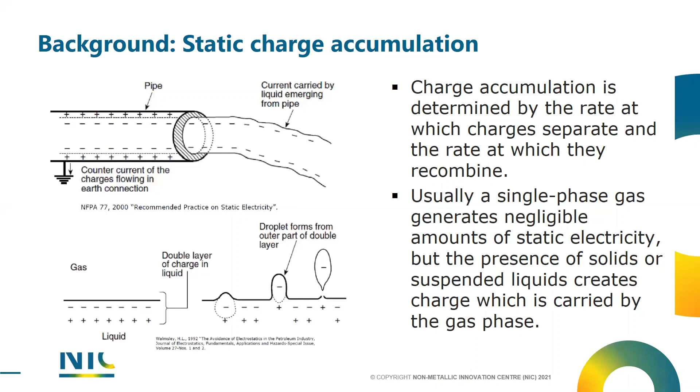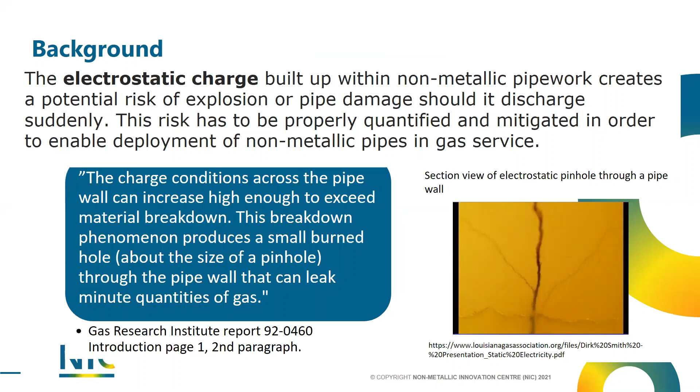So the risk of electrostatic discharge should therefore be properly quantified and mitigated to ensure safe operation of non-metallic pipes in gas service, and this is a challenge that we've addressed in this work.

Our aims were to develop a model of a non-metallic system, and this would be a multi-physics modelling approach to assess the risk of electrostatic discharge. The problem is highly nonlinear and multi-physical, and we would validate the model against experiment. So that was a challenge.

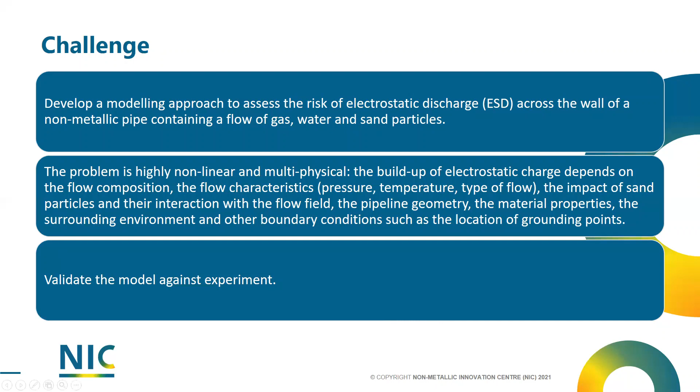So can we predict the risk of electrostatic discharge in non-metallic pipes? We created a hierarchical assessment method, whereby increasingly more detailed and complex models, as you progressed down the levels, gave more accurate results. So going into detail on the different levels.

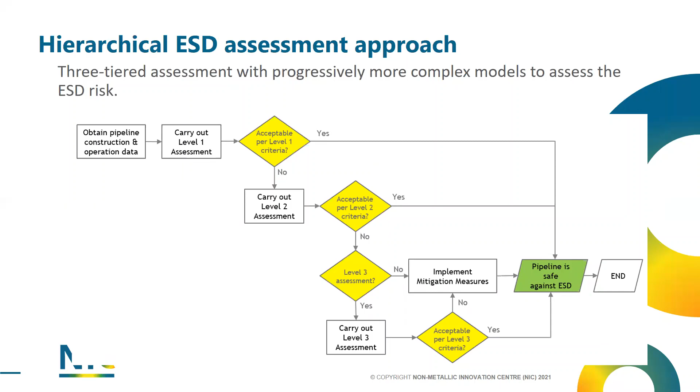Our level 1 approach, which was the baseline approach that we adopted, was the most conservative method and relied on determination of the flow regime using Baker or Mandhane charts, which use the gas and liquid velocity as inputs. If a mist flow was present, then it was determined that there would be a high risk of static charge buildup and potential discharge.

And so the operating conditions would be altered to avoid this mist flow regime. This approach has several limitations, however, in that it is reliant wholly on the flow regime, it's overly conservative, and the proposed mitigation measures can be difficult to implement. In addition, it doesn't quantify the risk of ESD.

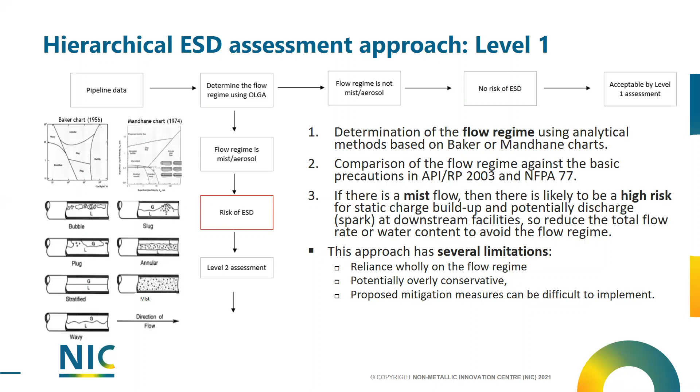Our level 2 approach aimed to address these limitations and improve the accuracy of level 1 by quantifying the risk of electrostatic discharge. So the pipe flow module in COMSOL was used to calculate the gas velocity along the pipe, which is one of the main inputs into the Walmsley equation.

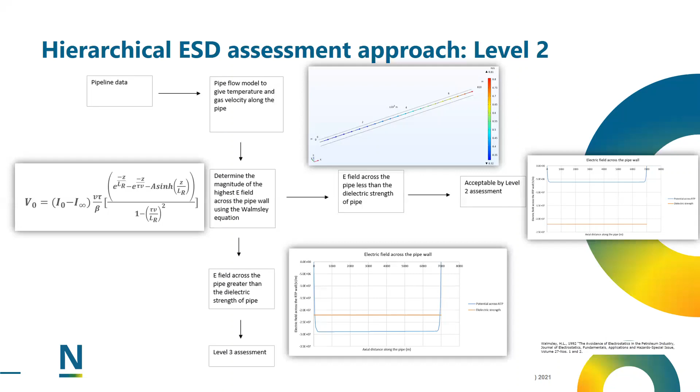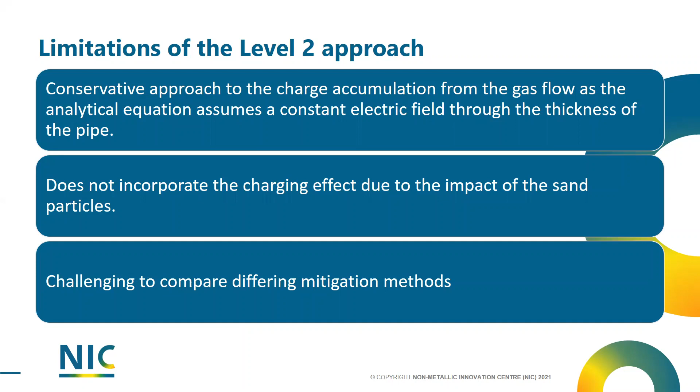So limitations of the level 2 approach are that there are conservative assumptions incorporated in the Walmsley equation, such as the assumption of a constant electric field through the thickness of the pipe. In addition, the level 2 approach does not incorporate the charging effect due to the impact of any sand particles present, and it's challenging to compare different mitigation methods.

So our level 3 approach was the full numerical modelling approach, accounting for the multi-physical behaviour in COMSOL. The velocity of the gas flowing through the pipe was found using the pipe flow module, and this was then used to calculate the streaming current expected along the pipe.

An axisymmetric model in the AC/DC module was then used to calculate the potential on the inner surface of the pipe and the electric field across the pipe wall.

The streaming current was applied as a boundary condition on the inner surface of the pipe, assuming exponential charge generation and charge relaxation, and grounding on the outer pipe surface and the pipe ends due to the buried nature of the pipes that we were modelling.

Applying the streaming current using the boundary current condition, which is more representative of the physical situation, allowed for a radially varying electric field that reduced the conservatism further and provided a more accurate value of the potential on the inner surface of the pipe.

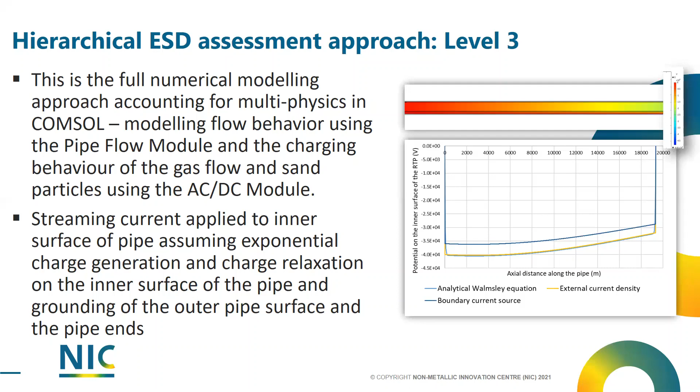We then built upon the level 3 model to add in the behaviour of sand. We did this using the capacitor model, which was used to model the charge transferred during the impact by treating the sand and pipe as either side of a capacitor.

Several tuning parameters in this model, so we used literature to tune that model. Then considered how to incorporate the charge transferred by the sand particles into the model.

We did this by effectively smearing out the localized charging due to the impacts over the impact area, whether that is the entire inner surface of the pipe for a fully suspended flow, or just the bottom region of the pipe for a moving bed. This was then incorporated into the model using an additional current density.

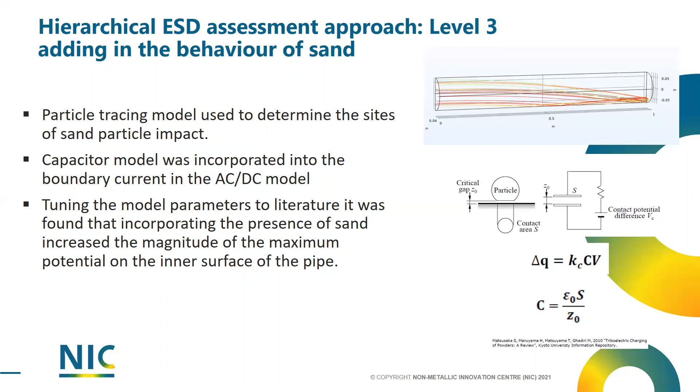So finally, we had a go at validating our models using a lab scale setup. We used a transient model in the AC/DC module this time because the steady state condition was not close to being reached, and compared this to charge evolved on a HDPE pipe in the lab. You can see in the graph to the left how the potential on the outer surface of the pipe was predicted by the model to increase with time, and the central graph shows the experimental results.

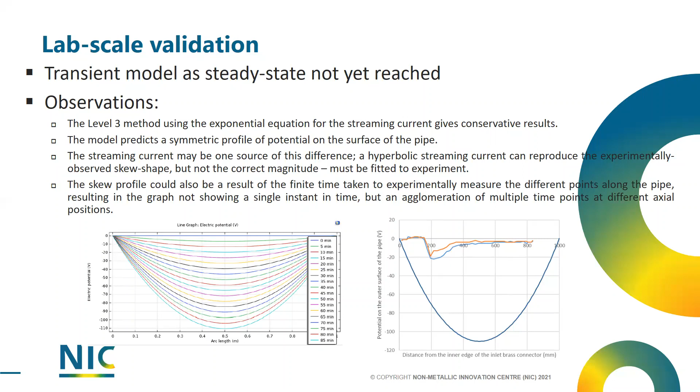The model can be seen to be quite conservative compared to the experimental results, which is a positive starting place for us. However, it did not capture the skewed shape of the experimental profile, nor the correct magnitude, so more work needs to be done in this area to further investigate this.

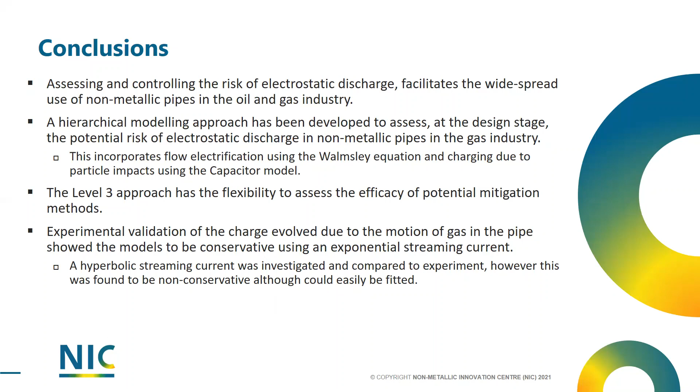So, conclusions. Assessing and controlling the risk of electrostatic discharge facilitates the widespread use of non-metallic pipes in the oil and gas industry. A hierarchical modelling approach has been developed to assess at the design stage the potential risk of electrostatic discharge in non-metallic pipes. The Level 3 approach has the flexibility to assess the efficacy of potential mitigation methods, and our experimental validation showed the models to be conservative, although more work needs to be done to investigate the level of conservatism between the experiment and the model.

So we aim to do some future work looking at validating the streaming current equation used in the models, and also the capacitor model, which incorporates the charging due to the sand.

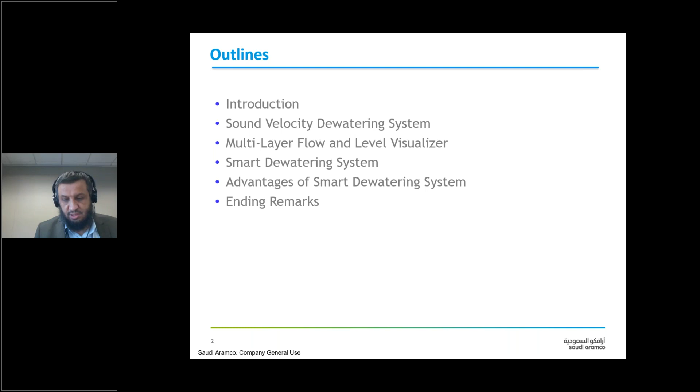Why do we need automatic dewatering? Basically, we need automatic dewatering to address known challenges in the oil and gas industry: mitigating hydrocarbon drainage, basically to ensure only water is drained; to eliminate water overflow and prevent upset to downstream plant operation; to mitigate corrosion of the tank bottom plates; to eliminate manual dewatering, which requires many plant operators and a lot of time; and to minimize manual water interface measurement and the need for plant operators to climb the tanks and take this measurement.

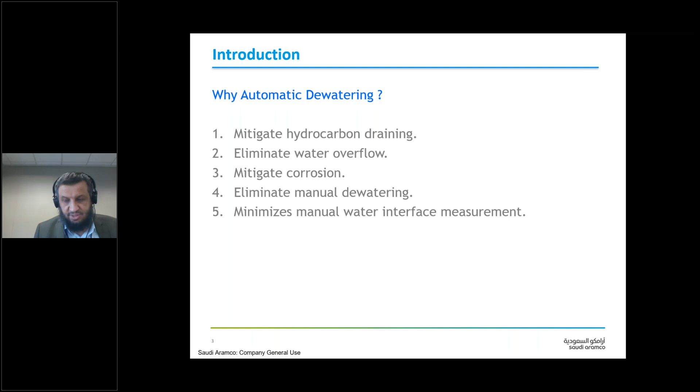Here is the solution to address the highlighted challenges: the Smart Dewatering System. It consists of two components, the sound velocity dewatering system and the multi-layer flow and level visualizer.

Allow me to elaborate on the first component, the sound velocity dewatering system. It consists of a smart sound velocity sensor, which can be intrusive or non-intrusive, a control system, and an automatic control valve. This is a patented technology with built-in analytics, providing three parameters: the drain flow, the media recognition, and the drain valve status. Basically, it will indicate whether the valve is healthy, is stuck, or has internal leakage. The system can be easily adopted, especially the non-intrusive type, and it will provide an automatic dewatering system.

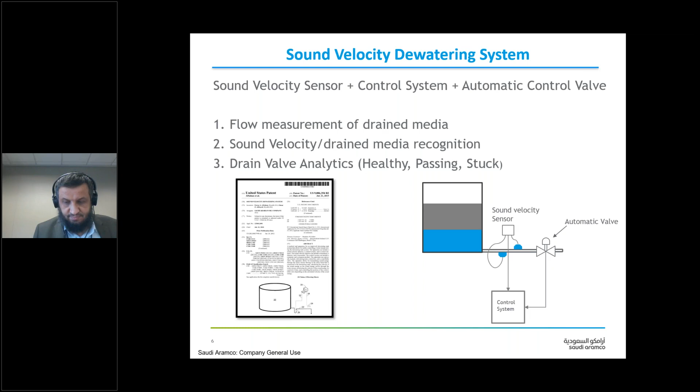As each fluid has a recognized sound velocity, the sound velocity dewatering system will measure that sound velocity. Then it will recognize the type of media flowing in the drain pipe. Once confirmed, the drain valve is opened and the drainage cycle is started.

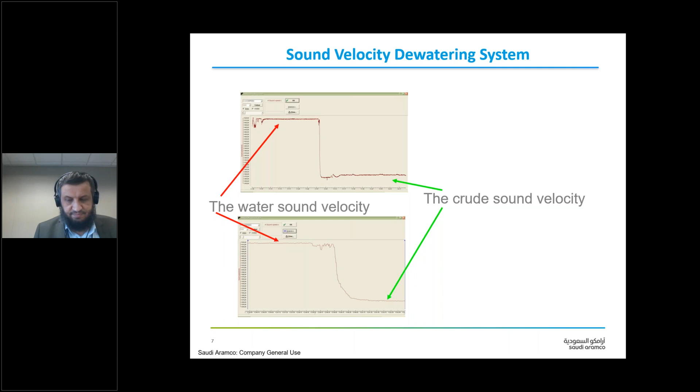The system was deployed in Saudi Aramco. The slide shows one drain cycle. When the drain cycle starts, the drain valve opens and the water is drained. When the sound velocity drops below a preset value, the valve is automatically closed. What you see in the slide is data collected from the first pilot installed.

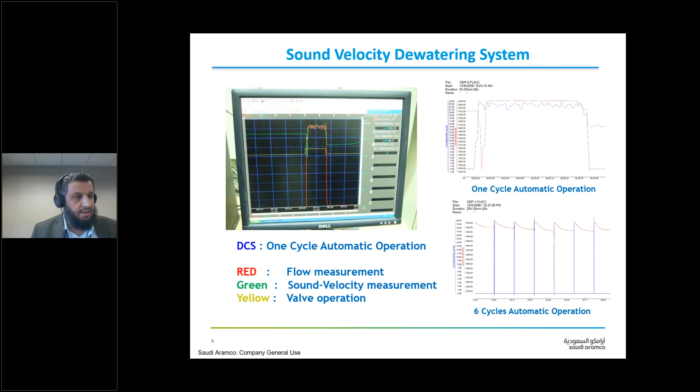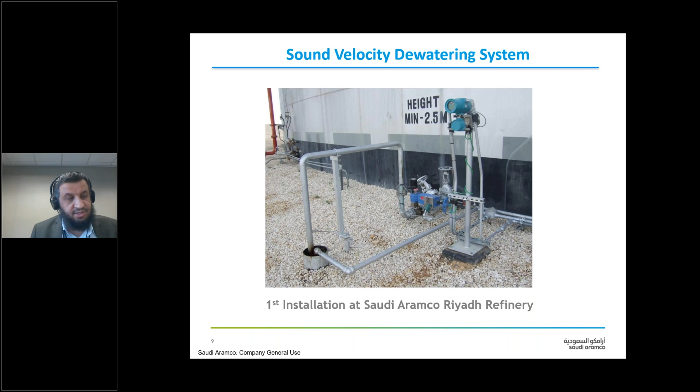The multi-layer flow and level visualizer is the second component. It consists of an array of sound velocity sensors, though it could also use other types of sensors. This is a granted patent technology which provides 3 parameters: the total level, the water interface, and the temperature measurement.

It's worth highlighting that the multi-layer flow and level visualizer scope goes beyond tank dewatering and includes even interface measurement in very challenging applications in the upstream industry.

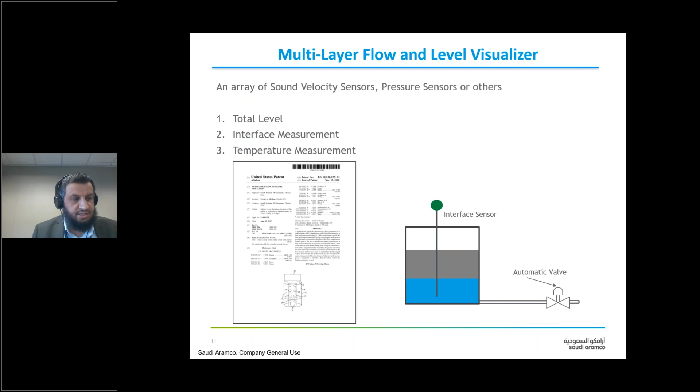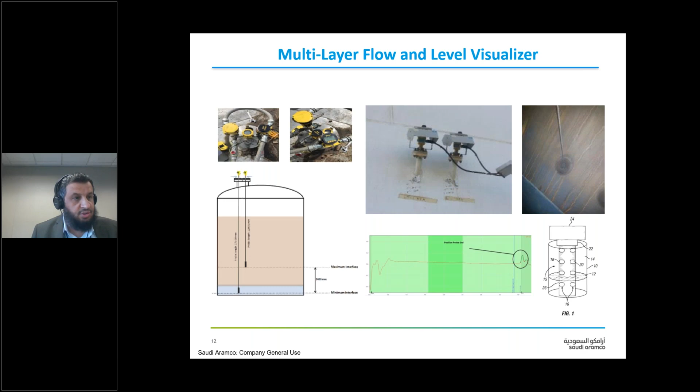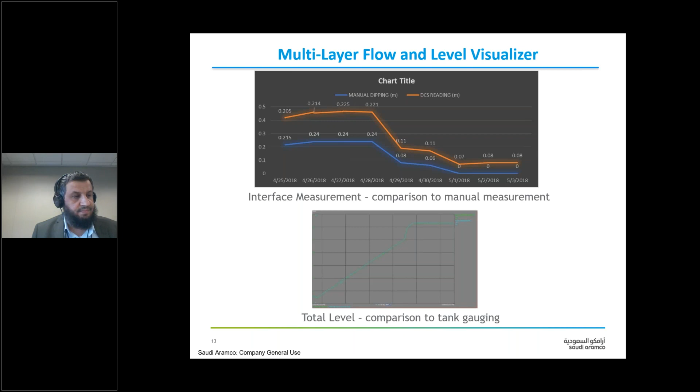Let's now combine the 2 components together to build the smart dewatering system. The smart dewatering system is a filed patent. Within 2 months it will be a granted patent, because we just recently got the approval.

It will provide up to 7 parameters: the total level, the interface, the fluid temperature, the hydrostatic pressure, the flow measurement, the drained media recognition, and an important piece of information, the drain valve analytics—whether the valve is healthy, passing, or stuck. All of this data can be transmitted into the control room.

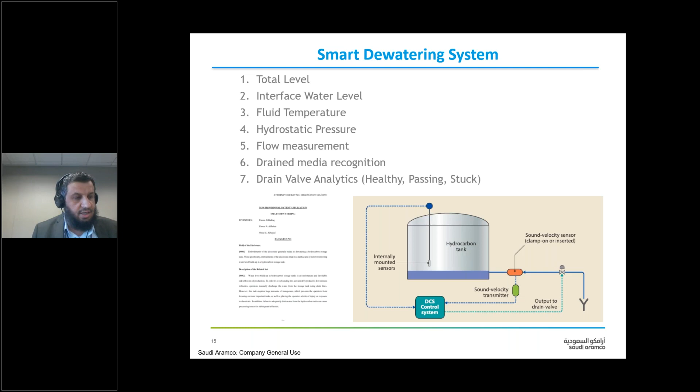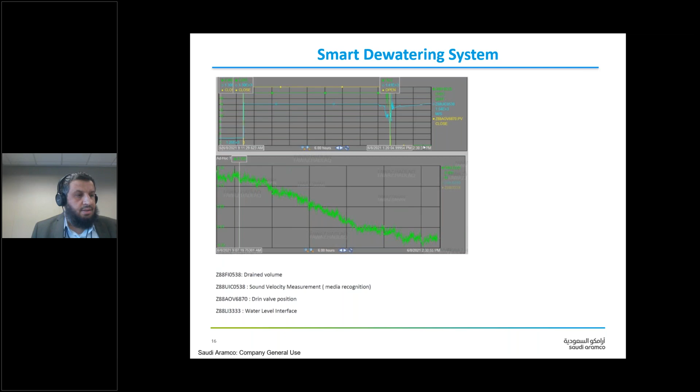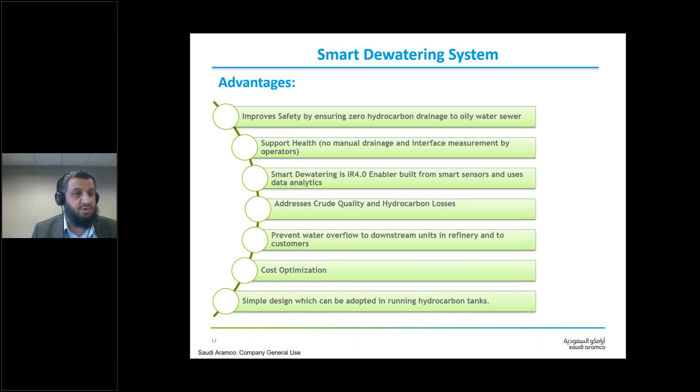The smart dewatering journey started in 2010 with the first pilot and the first patent filing. Smart dewatering has 3 associated patents and has won many awards from Saudi Arabia—the King Award—from Saudi Aramco, from the Gulf Engineering Union Award, and international awards like the ISA Excellence in Innovation Award. We are also honored to be an IChemE 2021 finalist in 2 categories: process automation and digitalization, and oil and gas.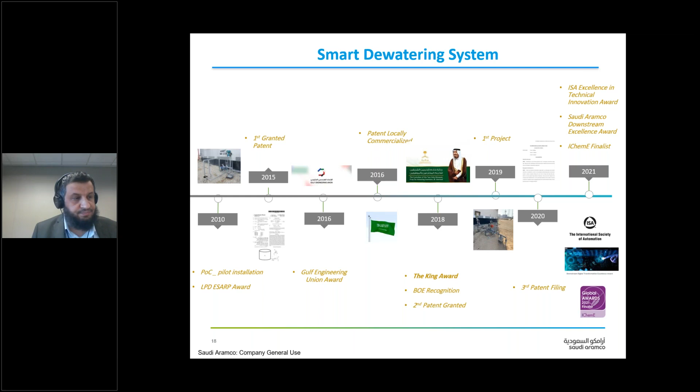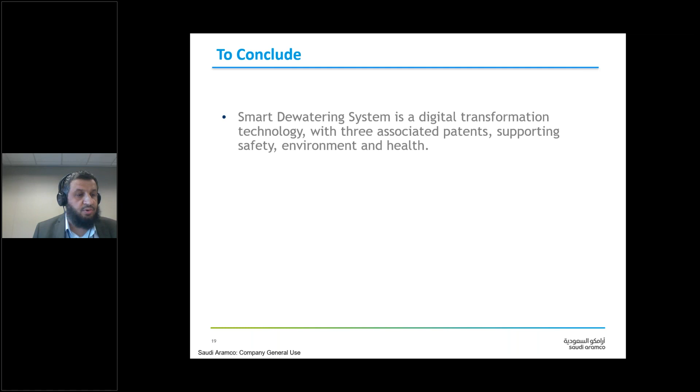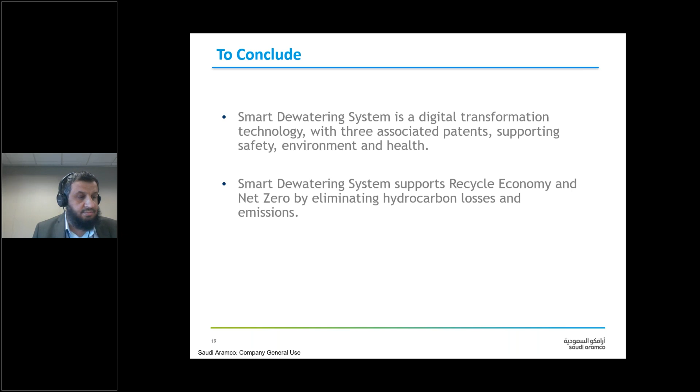To conclude, let me highlight a few points. The smart dewatering system is a digital transformation technology with 3 associated patents. It supports safety, environment, and health. It supports the recycle economy and net zero by eliminating hydrocarbon losses and emissions. Smart dewatering provides a simple and cost-effective solution for automatic water drainage and monitoring the drain valve condition.

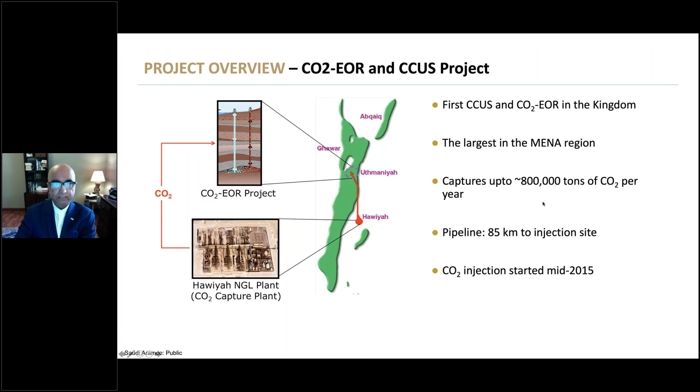There are two major components for this project: the surface, which includes the CO2 capture, dehydration and compression facility, and also the pipe that takes it from the capture facility down to the pilot area; and the subsurface, which includes the injection and production facilities. We have 4 injectors, 4 producers, and 2 observation wells that were drilled specifically for this project. The wells are all equipped with downhole sensors, real-time measurement devices, and automatic valves, so we can get almost real-time data from this project.

The project has become a test bed for the deployment of what we call Generation 2 intelligent field. The timeline at the bottom of the slide shows the time it has taken for us to do this demonstration project. We started in 2006, started production in 2012, and CO2 injection started in 2015. Today, in 2021, it has been 15 years from the start of the project, which emphasizes the time that these kind of CCUS projects take in terms of conception, design, implementation, and performance evaluation.

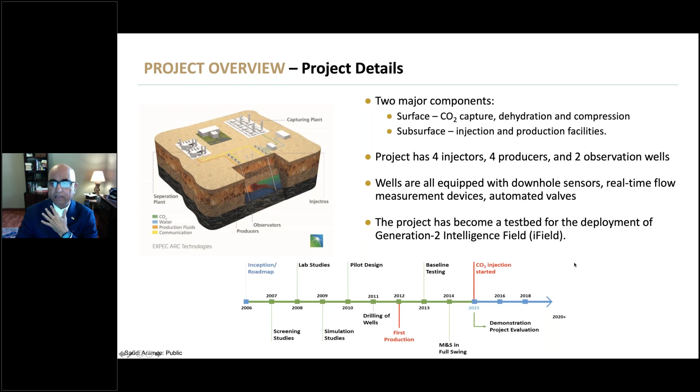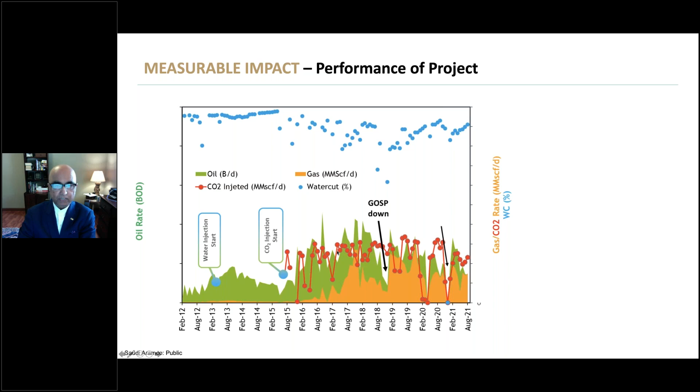This slide shows exactly that. The green is the oil rate, the red dots are the amount of CO2 injected, and the yellow is the gas produced. At the top, the blue dots are what we call water cut, or the amount of water that is produced. You can see that before the CO2 injection started, sometime in mid-2015, oil rates were dropping, and then after the CO2 injection started, they ramped up, and have been producing at 3 to 4 times the base rate in terms of oil rate.

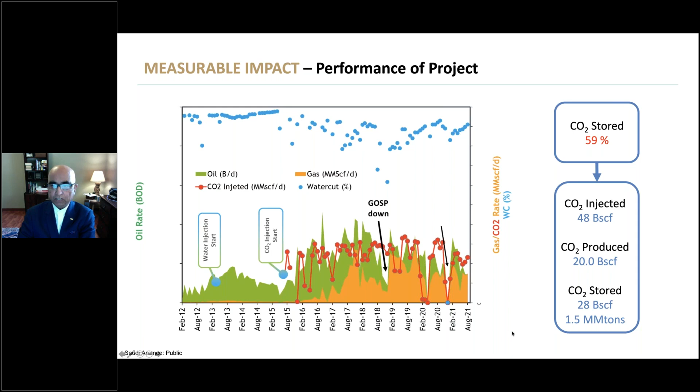The important thing to note here is that we have injected so far 48 billion standard cubic feet of CO2. Of that, 20 billion standard cubic feet has been produced, and therefore the CO2 that is sequestered, stored, or left behind in the reservoir is about 28 billion standard cubic feet, which correlates to 1.5 million tons of CO2. This is a solid number, and this is the amount of CO2 we have sequestered as part of this project. As we expand, that number will increase.

So in terms of impact, the two objectives that we had were enhanced oil recovery, and those gains have been very positive. The recovery has been significant. And on the second objective of CO2 storage, 28 billion SCF, or 1.5 million tons of CO2, have been sequestered. And we are still working on it. The project is still going on. We are right now in the process of assessing and evaluating the whole project.

By the numbers, this was the first CCS project in the greater Middle East region, highlighting our environmental stewardship and leadership. The 4x is the response from the project in terms of oil production.

59 to 60% of the CO2 that we have injected has been retained in the reservoir, so that bodes very well for sequestration. And we are injecting up to 2,000 tons of CO2 every single day, which is equivalent to 170,000 cars being taken off the road. So it's really a win-win project, a win for the environment and a win for additional oil recovery. 17 million hours is the number of construction and operational man hours without any major incident for this project.

And this project has received 10 prestigious international awards. In terms of HSE, we have addressed all aspects of health, safety, and environment at each stage, and we continue to do that, and that is a driving force for this project.

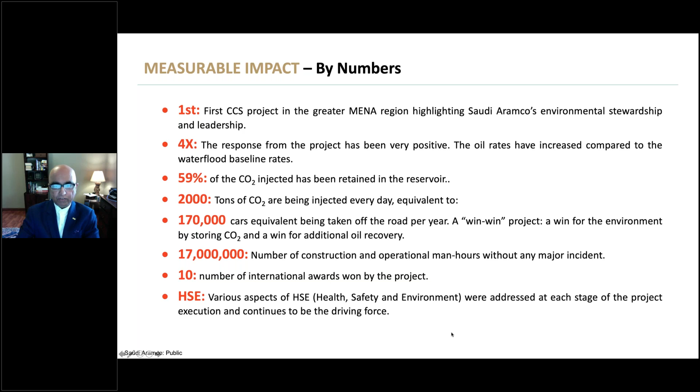We spent a lot of time, effort, and resources in terms of monitoring to see where the CO2 is going. And in terms of measurement, we did measure everything that is going in and everything that is being produced - injection and production rates - and from there, a material balance will tell you the amount of CO2 sequestered.

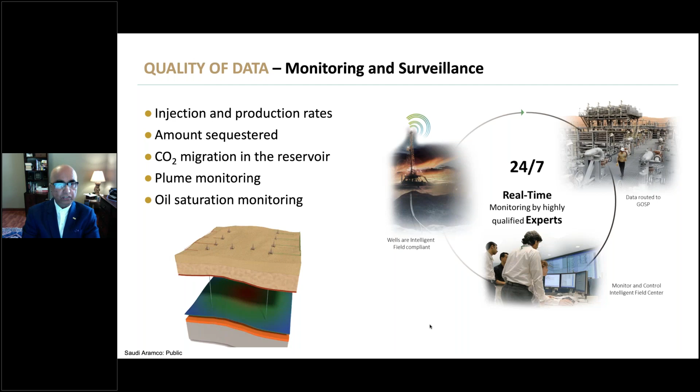We had deployed many technologies to look at the CO2 migration within the reservoir. An important aspect to see how the CO2 is moving within the reservoir is called plume monitoring. Another aspect of this project was the oil saturation monitoring, as to how this is desaturating the oil reservoirs.

So in terms of lessons learned, we have learned a lot. The first one definitely is that you require a solid team. A multidisciplinary, multi-department team is required for a project like this. We have now created a knowledge base, both in terms of CO2 recovery and in terms of sequestration. We have developed our capability in many areas, including simulation, drilling, processing, and injection. The point here is that you cannot decide today to inject CO2 and tomorrow have a well-executed project.

It takes time. We have addressed a lot of operational issues, and like any new project there will be headaches, and we have looked at those headaches and prescribed the Panadols or the Tylenol for them. In terms of sequestration, a lot of experience has been gained. And in my books, one of the most important things is the personnel that has been trained across the entire upstream, rather across the entire company.

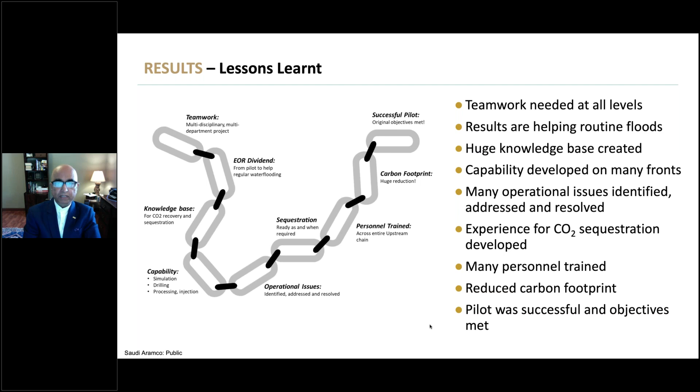And in terms of carbon footprint, there has been a huge reduction, and it has been a successful pilot. In terms of project KPIs, like I said, production gains have been positive. CO2 storage has been 25 billion SCF, and it has received 10 international awards. And the bottom row shows the number of granted patents, patent disclosures, conference papers, journal papers, and the deployed technologies.

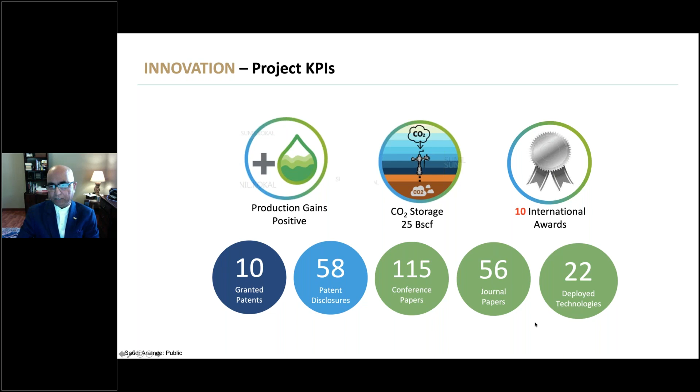So in my last slide, I would like to summarize that the project has been very positive, and we have met our objectives in terms of both sequestration of CO2 as well as enhancing oil recovery. This has led to a huge reduction of carbon footprint given the size and scope of this project. And we have gained a lot of knowledge and experience on sequestration aspects. And in terms of monitoring and surveillance technologies, we have done some firsts in the world, some firsts in the Middle East, and some firsts within the company.

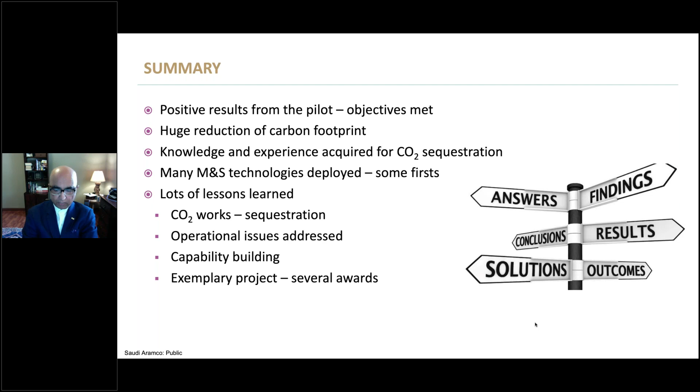Lots of lessons learned. We know that CO2 works, especially in terms of CO2 EOR, and you can sequester in a well-planned CO2 EOR project. We have addressed a lot of operational issues. We have developed capability building, and this has been an exemplary project, recipient of several awards. And it has been an important part of the circular carbon economy and energy sustainability within the company.

And my last comment would be that a project like this cannot be executed by one person. There's a team across the entire company, and I would like to acknowledge the contributions of each and every person who has worked on this project. Thank you very much.